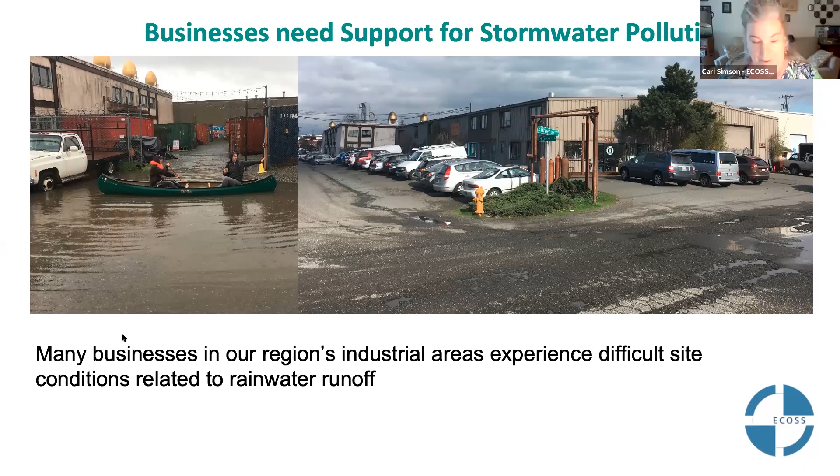So that's the kind of site constraint that we have going on.

The Equinox—Marquee Machinery is a project I worked on back in 2009. I don't think I'll have time to talk about it today, but this was the first industrial strength GSI project. I encourage people to check that out; I can give you the address to go look at it.

Equinox Studios is located at 5th Avenue South and South River Street and has 125 artists who now have 100% ownership. As tenants pay rent, they actually gain equity. The goal of the whole place is to create a sustainable, affordable arts community in Seattle.

In 2018, ECOSS started partnering with Equinox to create this large scale GSI demonstration site, because there's 100,000 square feet of art space inside, but 62,000 square feet of roof area on all the buildings that Equinox owns. We thought this is a great location to showcase and test out different types of green infrastructure, because of its proximity to industrial businesses in the Duwamish—anyone could go look at them on their lunch break.

Or after work. We just thought this is a great visible way to share this information. Also, because Equinox is such a large arts complex, over 18,000 people go there every year for public events. Again, this is a great way to educate artists and other folks about how green infrastructure works.

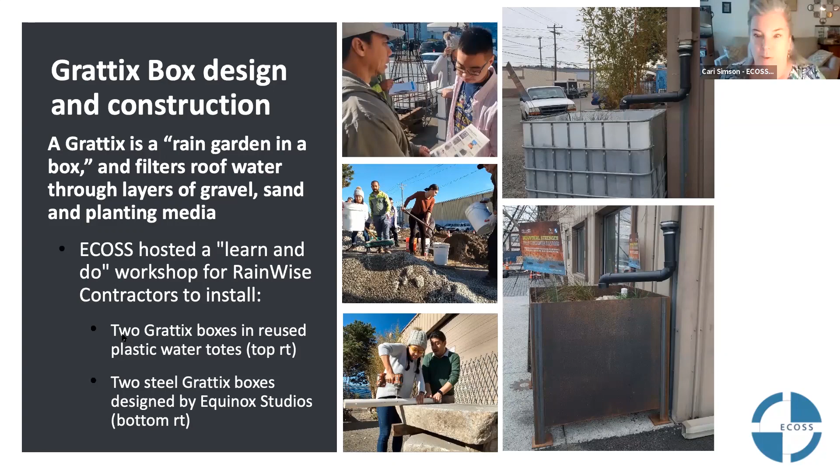At the Learn and Do workshop, we had 2 Rainwise contractors, one who spoke Vietnamese, one who speaks Chinese as their first languages. They were learning along with ECOSS staff how to build these, and we built them together in a day—it was really exciting. We plan to do more of these Learn and Do type events now that we've figured all of this out.

The second technology we've built is an oyster shell cistern. I had never heard of this, but found information from the port that they've been using it to mitigate copper and zinc on their own properties in their stormwater. Coincidentally, ECOSS rents office space from the port, and one of our buildings has 20 oyster barrels around the facility. I put all this together and contacted the port, and their staff came and taught us how these are built.

Essentially it's a cistern filled with oyster shells. The copper and zinc naturally adhere to the oyster shells, removing those heavy metals from the water as it's filtered—it's like a Brita filter, kind of. The port has done several years of testing and found a 41% decrease in zinc and a 33% decrease in copper after they put these systems on their buildings.

We did pre-testing last year before this whole project started. We're going to do post-testing in June, and we hope to see some results to share with people of the percent decrease.

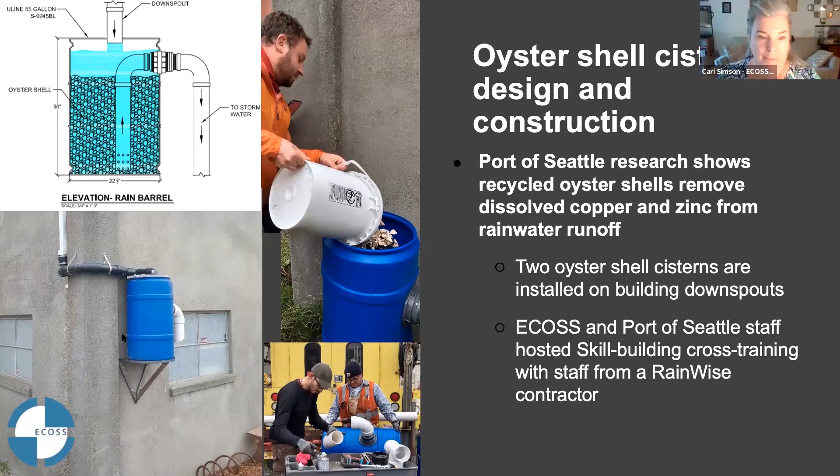And again, the Port of Seattle staff came out and showed us how they made them, and it was a great hands-on activity with Stone Soup Gardens. Two of their staff were helping do the work with us that day.

So the last collection of technologies at Equinox is permeable paving. In the top right picture, there's permeable asphalt, then permeable concrete, and then pavers. The top left picture is a 6-inch thick permeable concrete loading area, designed to stand up to big trucks coming in and out. On the bottom left and right, you can see the Paverguide, basically a tray that the pavers sit in, letting water flow through into an underground cistern holding 4,800 gallons of water, which will be used for irrigation.

All of this has been the brainchild of Sam Farzano from Equinox, partnering with ECOSS for fundraising, education, and everything else. This is really to transform his space, or this artist's spaces, to be more sustainable and provide this education.

The paver guide system is one of Pure Blue's technologies that they work with their innovators to promote. If you want to learn more about paver guide, there's a link to check that out.

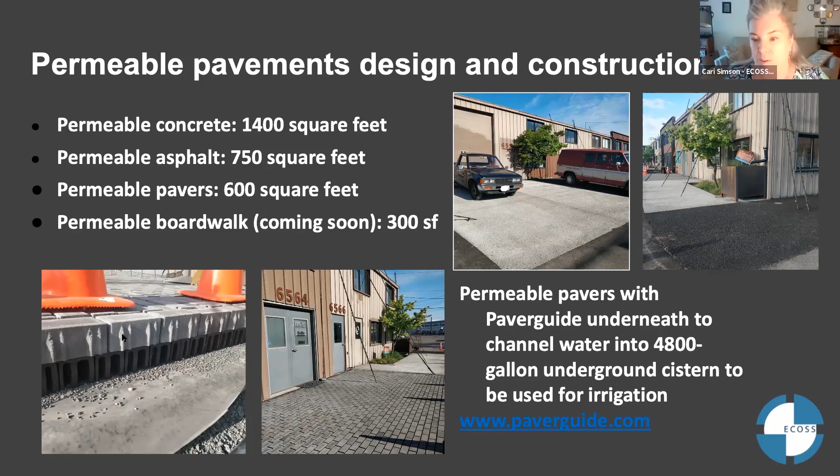For next steps, we are going to do the water quality post-testing in June, or probably May, while we still have some rain. Because of the stay-at-home order, we wanted to do public tours but haven't been able to. So we're going to do video tours instead and post those on social media, linking to everyone who's been part of this so you can see how each piece works.

Equinox and ECOSS will be building the next phase, which are Equiboxes - really large rain gardens in a box, like Splash Box and similar systems - that will capture the rest of the large building I talked about. Then we're going to build a vegetated wall that uses the harvested water for irrigation. Eventually that whole complex of arts buildings will be transformed.

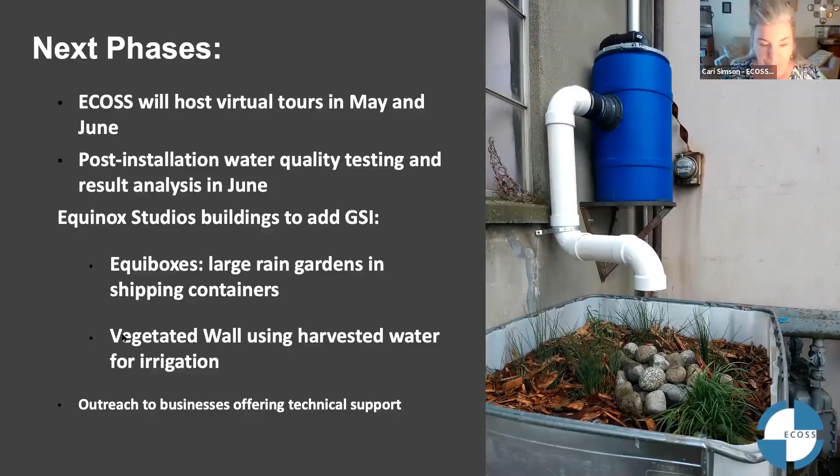So that is our blazing fast overview of the Equinox project. To wrap up, I think this project demonstrates how we can support businesses seeking low cost, out of the box thinking to address challenges on their sites. Businesses have been somewhat left out of the green infrastructure revolution because of their site constraints, and I think this is a way to bring them into the fold.

I encourage anyone with commercial or industrial business partners who could work with ECOSS to reach out and get in touch with me. We're looking for a few early adopters who would want to do this in the Duwamish area.

There are also going to be green mini grants, GSI mini grants, available specifically for projects in the Duwamish, coming from King County's part of the Superfund cleanup. King County is providing money to be handed out as mini grants, so there is an opportunity for funding for people that want to do this.

I want to give a shout out again to the funders: Boeing Company, King County Flood Control District, BNSF, Aspect Consulting for providing engineering services at a discount, the Port of Seattle, King County Wastewater Treatment Division, and Pure Blue for technical support for Paver Guide. We also received a grant from the Puget Sound Stewardship and Mitigation Fund, a grant-making fund created by Puget Soundkeeper Alliance and administered by the Rose Foundation, to do the water quality testing and reporting. So thank you very much.

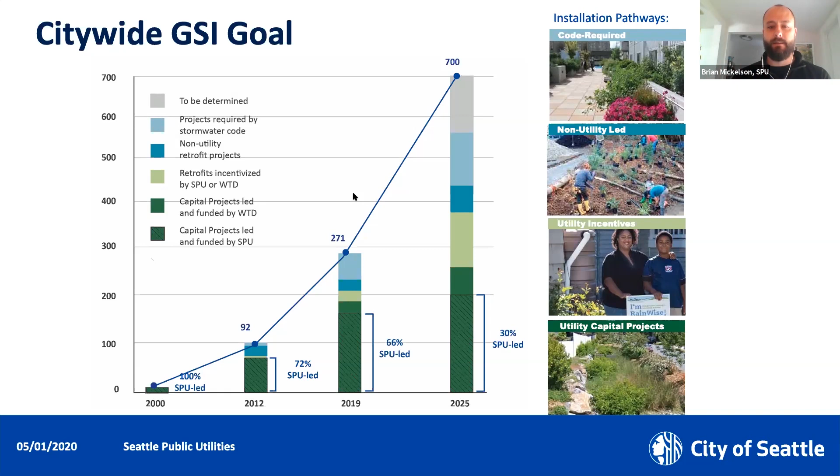Go to the next slide, please.

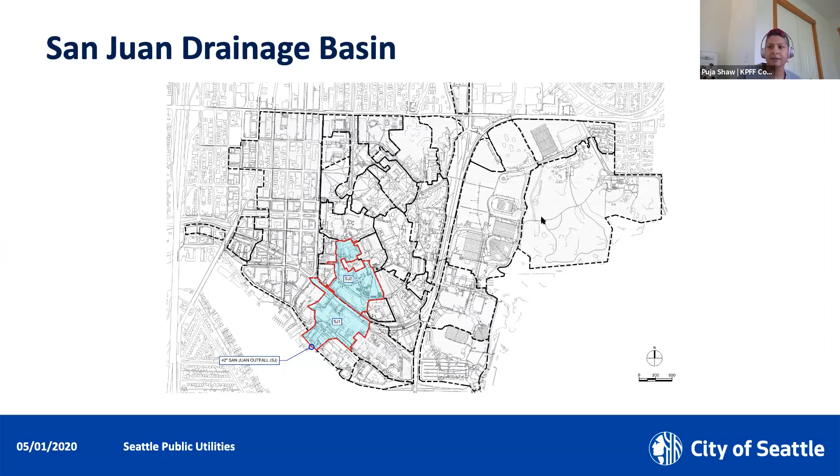In the next slide, we'll zoom in a little bit on the part of the basin we're working in. You'll see the red rectangle in the middle of the screen; that's where the UW Health Sciences Education Building will be constructed. That is the project that enabled us to move forward with this regional GSI facility. So early on in the process, the Health Sciences Building is being designed and built under a progressive design-build delivery method.

That allowed KPFF to present this idea really early in the planning process for this project. So we were able to approach the contractor, the architect, and the owner and say, here are the storm drainage requirements that would typically apply to this project, and here's something that we think would provide an enormous amount of benefit if we were able to do it.

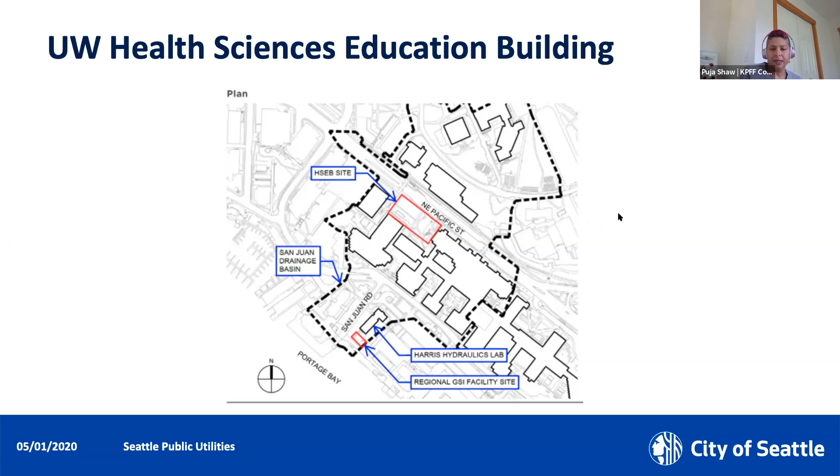And so that's when we brought the regional GSI facility into question. It was a great opportunity to look at the overall project schedule and budget and say, this is the time when we really need to start looking at it. So that's when we started the process of looking at all the pros and cons.

If we were to look at this project on a typical project-by-project basis, and see what the pros and cons are compared to this regional facility. Generally, if you're looking at a project-by-project design, you've got new stormwater management providing benefit, there's no agreement required with the city, it's done under the drainage code as written, and the costs up front are known and they're lower.

There are some cons associated with that, particularly from a campus perspective: the restriction of the design of the overall site. If you need to put in bioretention planters next to the building, things like that, where the architect might want a little more flexibility.

So then we started looking at this regional facility, and the biggest pro in everybody's eyes was the innovation associated with it. The more we looked at it, the more we could tell that the environmental benefit of this facility would be significantly higher than the standard project-by-project treatment. There would also be more treatment up front for the entire basin in terms of pollutant removal from the downstream system.

So some of the cons: it occupies otherwise developable area on the university campus. There's also an agreement required, so the university had to wrap their brains around what the agreement might look like. That's the piece we're really talking about together here, that the innovation piece comes with some effort, and that was a piece everybody had to look at.

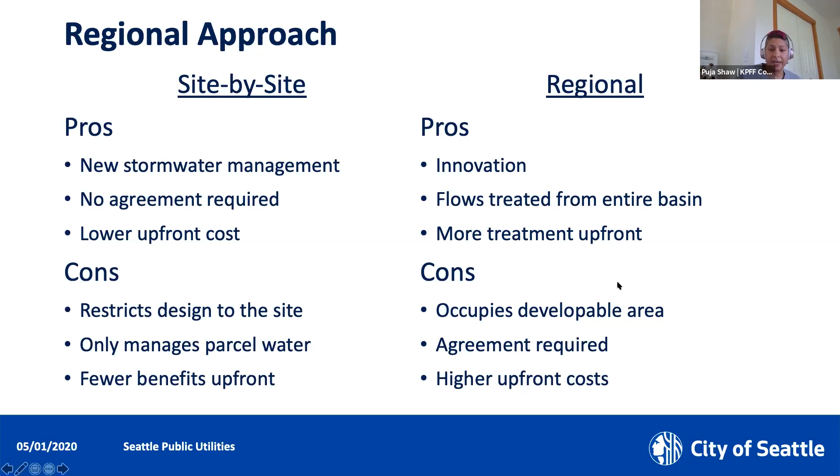What does this agreement entail? That's when we started talking with SPU and the City of Seattle and developing that partnership with them. Everybody had this common goal, and right now we're working through that agreement, and it's been a really educational and valuable experience for everybody to go through.

Everybody loves data, and this has really been a powerful graphic in terms of explaining what this regional facility does for the downstream system in terms of pollutants removed. The green line below is a projection of how many pollutants would be removed over time if the university were to develop within this basin project by project and implement stormwater management tools as required by code. The purple line above illustrates pollutant removal if we were to install this regional facility. You can see it immediately has a higher impact, and over time that impact just continues to grow.

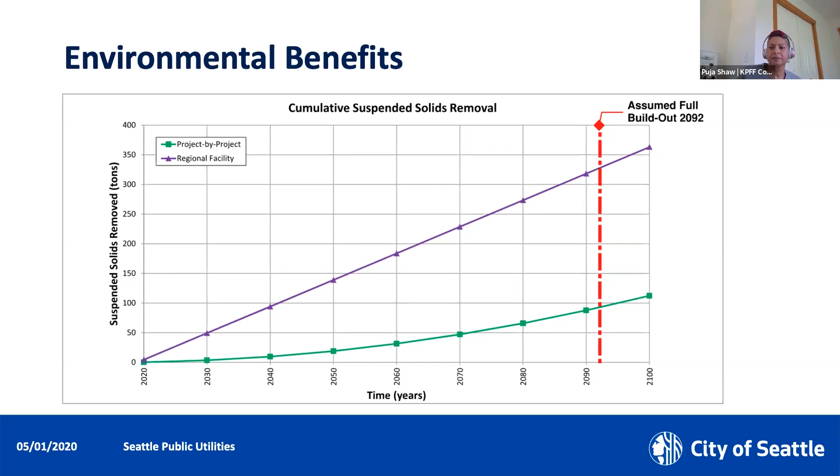Then there's the educational side of things. Things really started coming together when we were planning this. We looked at the outfall for the basin and realized it is adjacent to the Harris Hydraulics Lab building, which is a civil engineering building. Outside, there's a concrete flume that used to be used as a lab tool, where they would run flow tests and conduct experiments. Right now there's a fence surrounding that, and it's been abandoned, with blackberries growing in it.

We looked at that and thought, well, those are planter walls. If we clean this thing up, using low-impact construction techniques, we're not going to dig a new hole. We can install the biofiltration material in this already-built box and reduce the footprint that way.

The other benefit of this is that it's right next to the engineering building. We've already got some students helping us plan the locations of some monitoring ports so they can continue to monitor the influent and effluent of this system and compare the two to see what type of benefit this is going to have. That's been a really fun piece of this, having the students involved—they're really invested in it, it's literally right in their backyard. So that's been a really exciting piece as well.

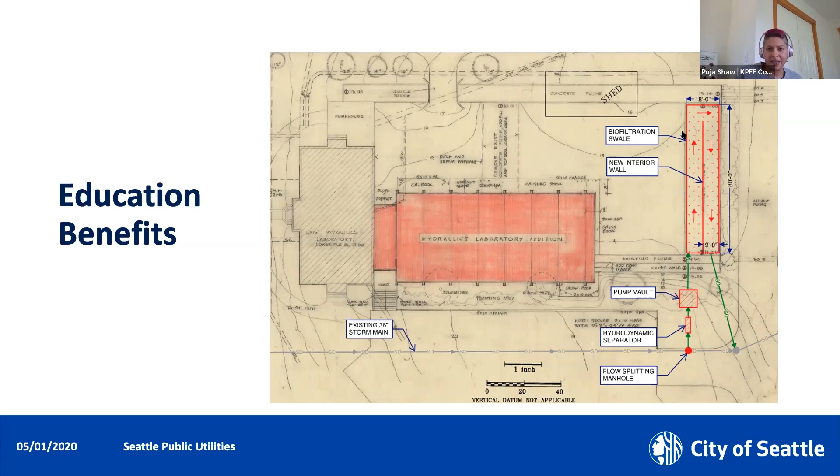But in all seriousness, it really does take a collaborative approach to make partnerships work, not just this partnership, but any partnership. Our team, it's a core team, but a lot of people make this work. In addition to Puja and myself as the leads, we have a core team of folks with a lot of stormwater code expertise and GSI design expertise.

We work with the Seattle Department of Construction and Inspections, who are responsible for drainage review. It's really easy to get stuck in our silos and the things we default to every day that define our work. But with a partnership, it's really important to recognize everyone's contribution.

I really appreciate how, from the beginning, we've gone about this and looked at this partnership, leaning into the risk outside of the regular, everyday regulatory stuff. I think a really important component is trust, leading with good intentions, and being really honest and open with each other as much as possible.

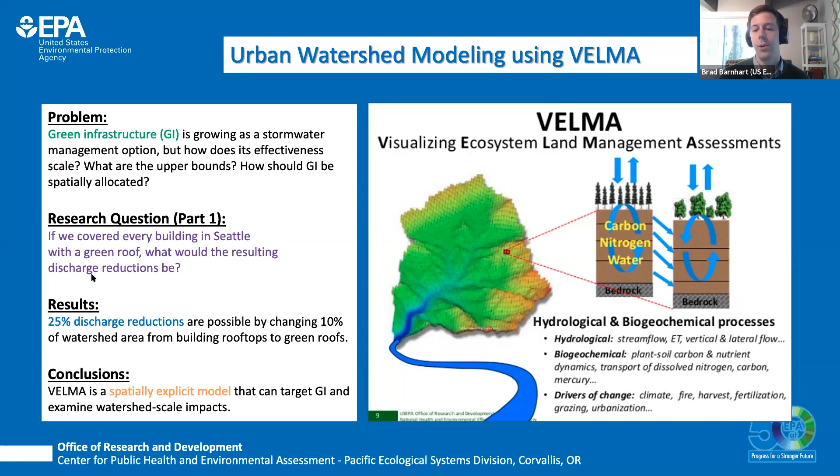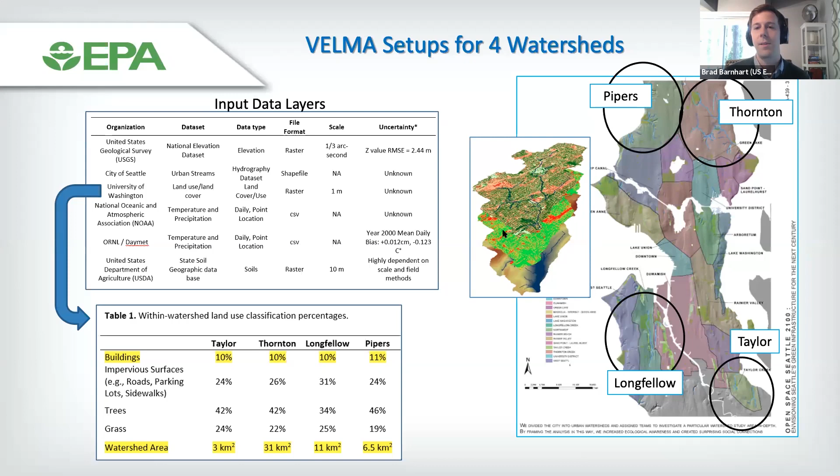On the right-hand side of this slide, you'll see the 4 watersheds that we targeted, Pipers Creek, Thornton Creek, Longfellow, and Taylor Creeks. VELMA basically uses a lot of different input data layers such as elevation, soils, land use, and simulates how water will flow through these different land types to watershed outlets. One thing to note is that we found about 10% of these watersheds were covered in buildings. And even though these areas are in different parts of Seattle, they still had pretty much the same land use, land cover characteristics. So they're all heavily urbanized. It was just interesting that they came out so similar.

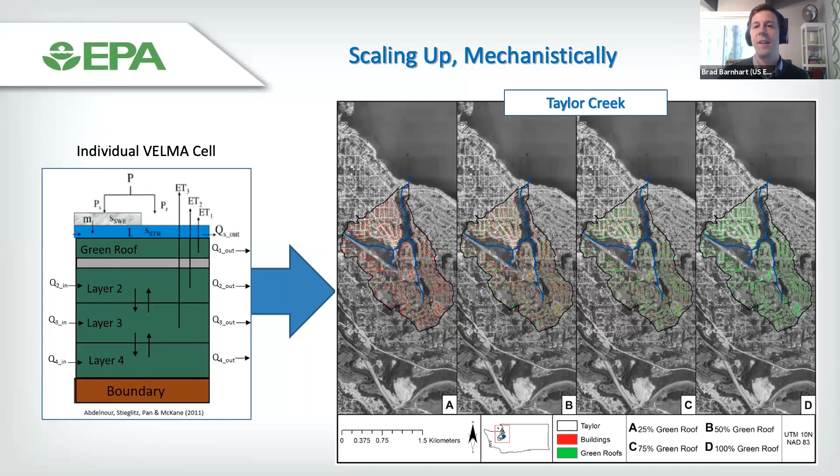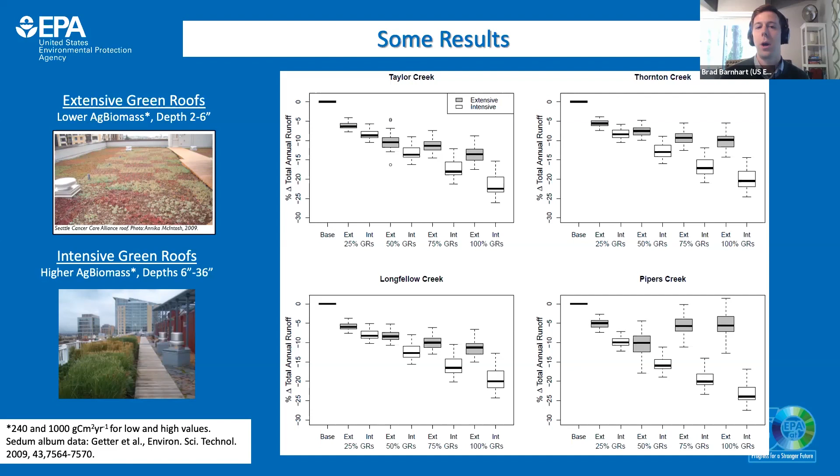So to jump to the results, I'm skipping over a lot of the model validation that we did, but really the big picture results are as you implement more and more green roofs, you get larger annual runoff reductions. These max out at about 20 to 25% annual runoff reductions when you're covering every single roof with a green roof. We tested 2 different kinds of green roofs: extensive green roofs that have lower biomass and smaller soil columns, and intensive green roofs which have thicker soil columns and can hold much larger above ground biomass, larger plants and things.

So generally as a takeaway, models are really useful. One of the main advantages of using models is you can take large or small scale results from case studies and extrapolate them up to watershed scales and really large scales.

So to transition, we did this modeling work, but models are always dependent on what realism you incorporate into the model. Jonathan's going to talk about how we've taken our current model setup and improved it by incorporating other aspects.

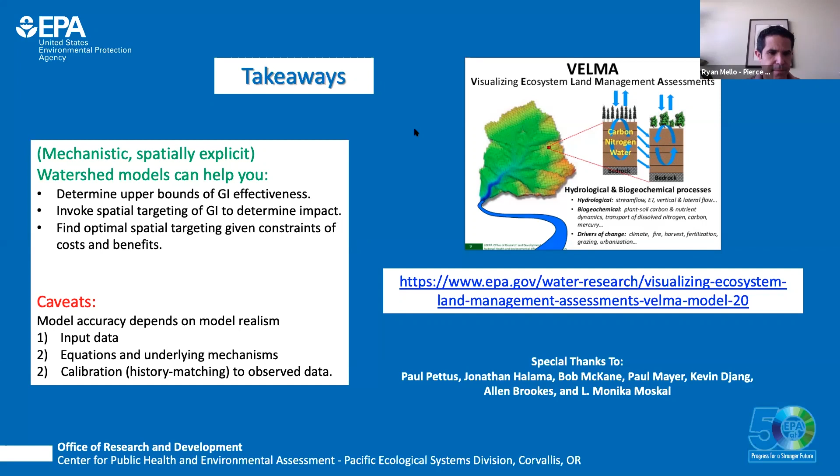Thanks. Jonathan, you should be able to control the screen by clicking on it now. Oh, there we go. Can you hear me? Yes, trying to see if there's a delay. Ah, I think I got it now.

I'm Jonathan Halama, working within the Velma team. Leading off of Brad's segue, this idea of green infrastructure and placing it on many roofs led to the idea of other types of green infrastructure and their placement. For the roof example, we used roof data to guide the placement and played around with the level of green roofs.

That led into thinking about other things beyond green roofs, like bioswales or microbial remediation, other forms of potential reduction of water or water storage capacity, and how we could help mitigate contaminants, because a lot of our work in natural water systems has to do with salmon recovery.

Moving from natural landscapes into urban landscapes was a bit of a challenge for Velma, but we've overcome it. I want to play this video to demonstrate how Velma functions, leading off of Brad's idea of individual pixels that build up to full systems and how they interact. I'll play this video, pay attention to the end of October.

Whoops. Plan. Trying to click, but I'm having trouble getting to the play button. Can someone hit play on that? It seems like when I click, it just moves to the next slide. Yeah, let me try. Oh yeah, try that.

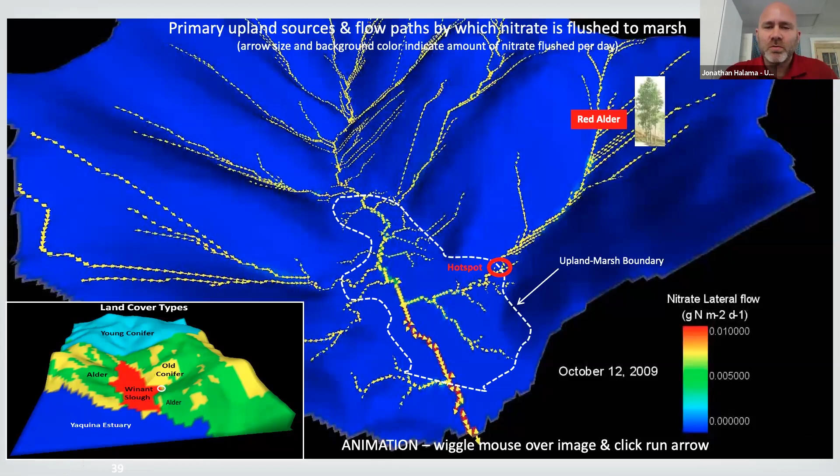If we get the video playing, the yellow lines represent the major flow paths, and as there's an increase in water, those arrows get larger, representing higher flow. At the end of October, where there is alder, you have a buildup of nitrate in the system. When there's a storm event, that nitrate starts to move laterally down through the system. There's a diagram representing the hotspot - this system of alder building up nitrate funnels down into a certain point, so you get a very high spike in nitrate levels as it moves into the marsh.

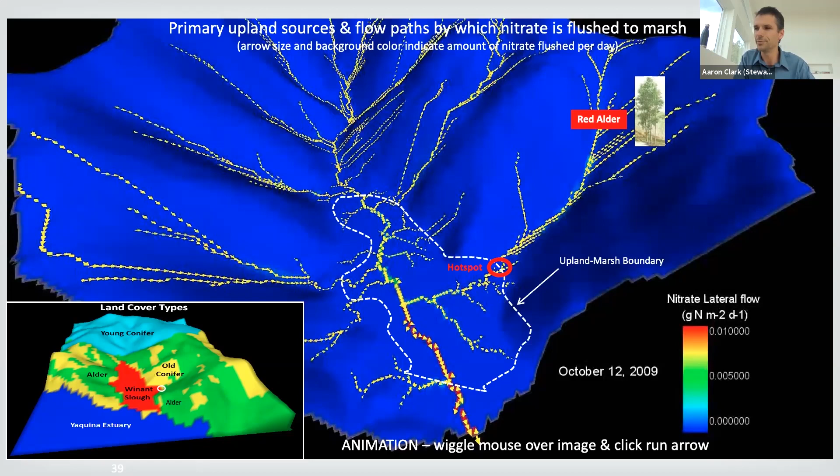Doesn't seem like the video works. If anyone's interested in this video, happy to share it with anyone. We can add a link to that video either in the Q&A or when we post the YouTube video version of the presentation. Yeah, we can do that. It's a really cool video, I recommend people watch it. And Jonathan, I'll share control back to you. Thanks.

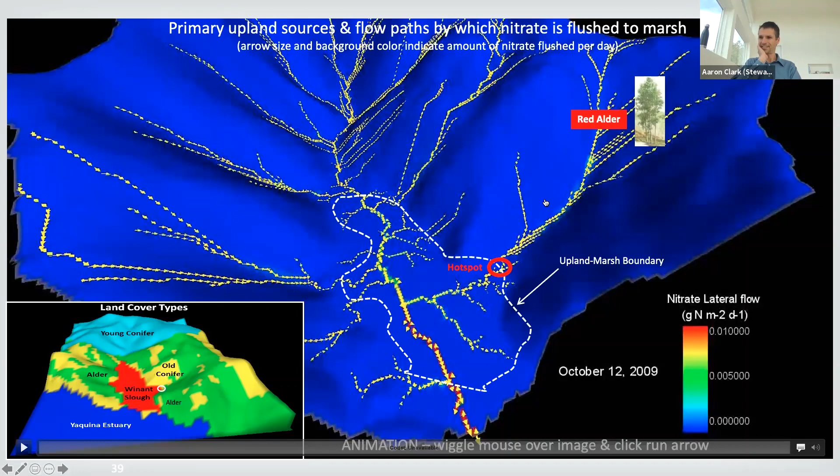Trying to see if I can, there we go.

Going from that natural system into urban systems after the green roof work, we realized we have streets, we have impervious surfaces. Cari mentioned a lot of this in her presentation, how water that would naturally get into the lower end of the system is no longer able to, because there's an impervious barrier. We have pipes that reroute water. So if Velma is going to be doing urban systems, we somehow need to reroute the water.

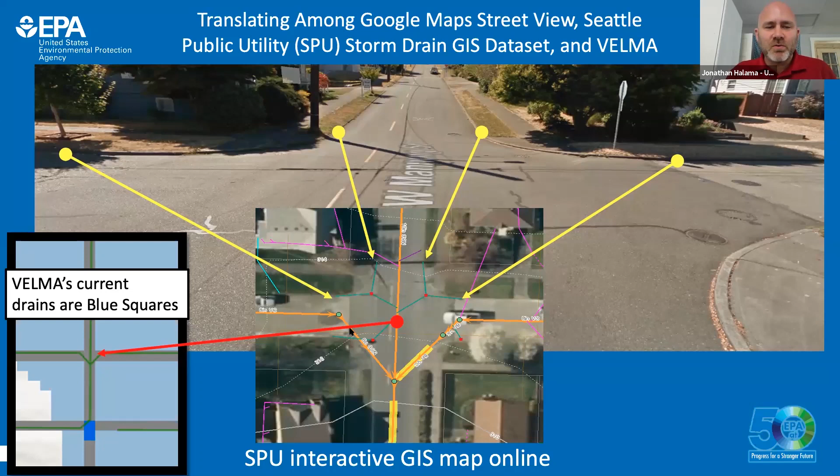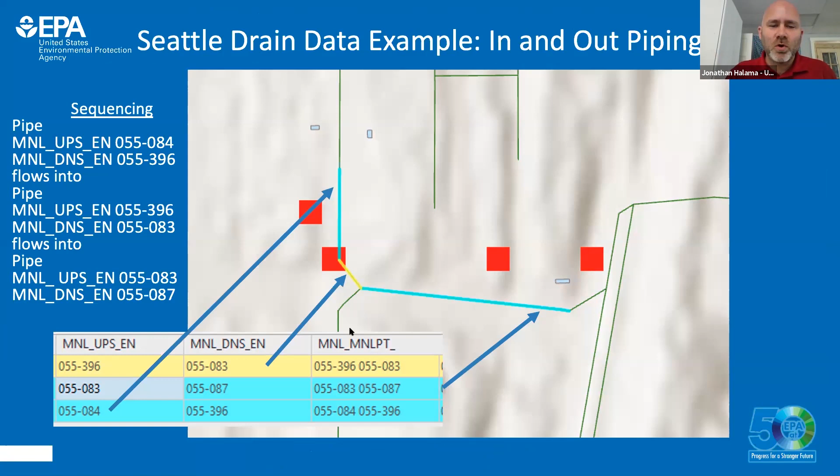So here we're looking at a Google Maps Street View scene related to the Seattle Public Utility map on their interactive map online. Looking at this, we found a great comparison, a great data set. We leveraged that data set to understand where the input storm grate locations are, where you'd see water going into the system, where the pipes are going, and ultimately where their outflow is. So we built a Java-based code tool to work through this data and format it in a way our Velma model could uptake.

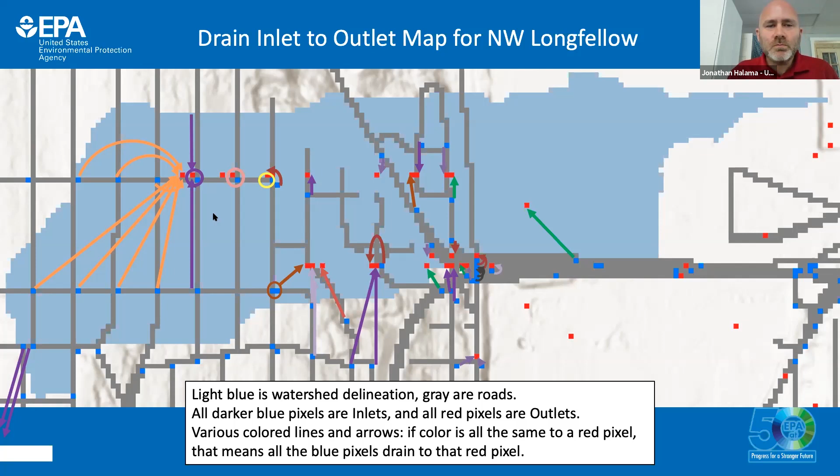And the main target of our work beyond the 4 watersheds Brad mentioned was then for contaminants, Miller Creek became of high interest. So that's the watershed we are currently working on, which is actually the upper end of the lower portion of the Seattle Public Utility. Most of the system though is City of Burien.

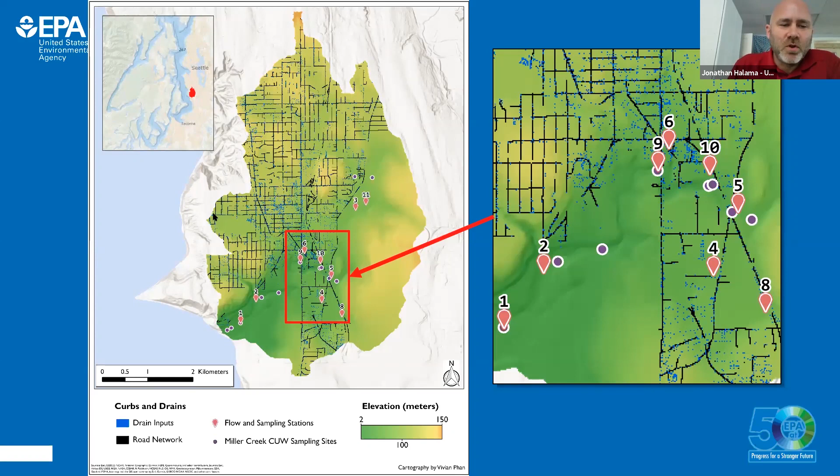So this is the main watershed we're going to be looking at to see how we can help place green infrastructure and hopefully be able to reduce, trap and reduce contaminants. And then the outflow from this will hopefully help salmon species.

So to show how this matters in a modeling system, the line at 0 would just be the natural state, so we're looking at the delta change in flow. Having only the outflow locations included is that blue line, that very low blue line. As you're running through, Velma's a daily model as it's progressing forward through time, this is a sort of representation of the hydrograph. The blue line is representing some of the outflow locations only, but including all of the input catchment locations and the curbs that flow water to those inputs, that is the orange line.

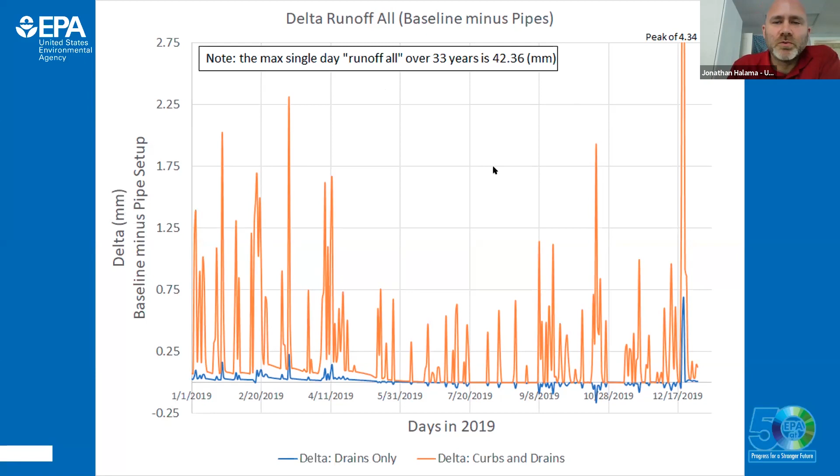This is just a representation of how much change is occurring in the model. The model doesn't really think in CFS, it thinks in millimeters of water per cubic meter per day. So these numbers look pretty low, 2.7, cut the graph down because there's a peak a little over 4. But in this system, in relation to 33 years of data, the max was 42. So including these road system curbs into our natural Velma model, which is already capable of doing fate and transport of water and chemicals, will really help us match the hydrograph a lot better in urban systems.

So to conclude, this framework provides us an ecosystem service tool people can use to estimate green infrastructure management across whole watersheds. The framework considers both the natural system, which is what Velma was really built for, but now we included streets and storm drains and can include existing green infrastructure, but also add hypothetical green infrastructure. This holistic watershed approach using green infrastructure and the fate and transport of chemicals in a natural system will be very helpful for people understanding how various types of management activity can help mitigate some of these problems and help our communities in the future.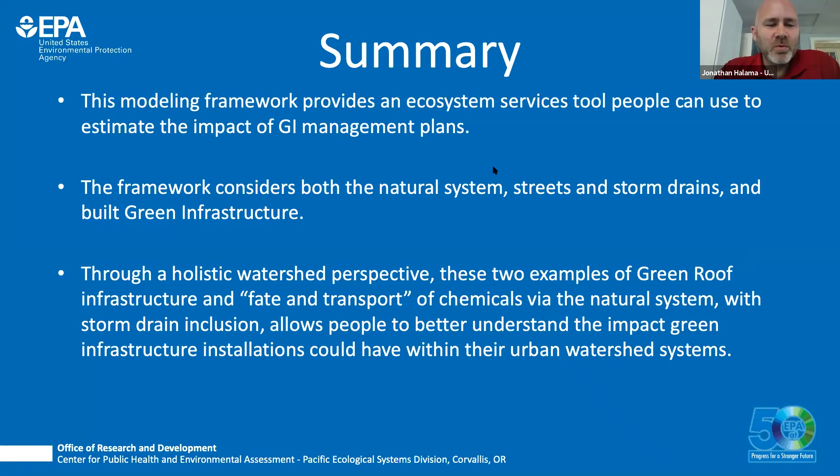Thank you, Jonathan. Super interesting, cutting edge thinking and work. I am curious, with the model in place, how specific is it to the Seattle area that you showcased for us? How applicable is it to communities outside of Seattle, outside of the Northwest? Do you envision taking the modeling work to a community outside of Seattle soon?

Yeah. You want to fill that, Brad, or I can fill it? Yeah, go ahead. Go ahead, no problem.

So in the natural system, VELMA has been applied to areas in the Chesapeake Bay system, other watersheds in Washington, a lot of work in Oregon, Northern California. So in a natural sense, it's been applied to many different systems. It's a very transferable model.

Once you have a setup and calibration, you can move it around pretty easily with no to minimal change to your setup. Beyond that, there's been talk of sites in Mobile Bay and also in the Duluth, Minnesota area. They're both interested in this green infrastructure work, and those are directly through other EPA labs that we've been working with. We also have a lot of partnerships in the Seattle area, so there's bigger potential work here for the entire Salish Sea, running it on systems all the way from Olympia to Bellingham potentially.